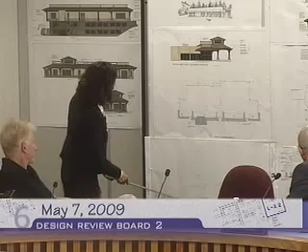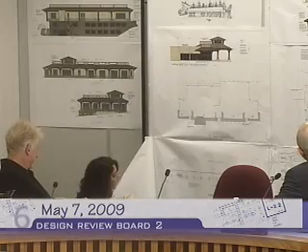This is the pavilion which is proposed at the entrance to the Vons. It's a double height pavilion. The marker is proposed to the side, actually on the next one. The marker is proposed under, to the side of the dining area under the pavilion.

The 4 parking stalls will have to be removed and will be replaced by 5 new stalls on top of, or adjacent to, building number 2.

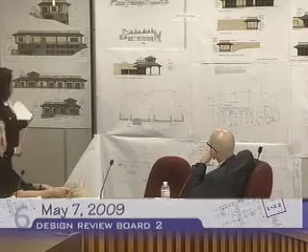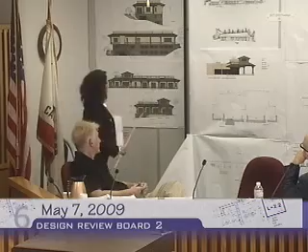The buildings in La Cañada Flintridge Street, I've got some drawings here so you can compare them together. As I mentioned, the design of the proposal matches the already approved or recently approved design of the building next door. You can see there the location of the main building, building number 1, building number 2, and that is the building in La Cañada.

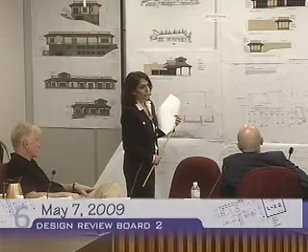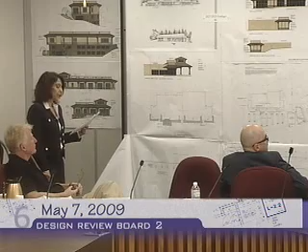The site is essentially unchanged. The proposed design of the 2 facades are appropriate for the neighborhood, and staff recommend approval of the project. This concludes my presentation. If there are any questions, I'd be glad to answer. Thank you.

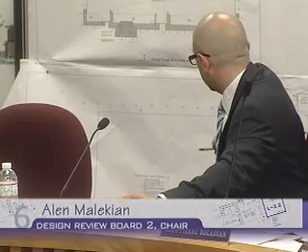One last question. I'm glad that there's openings, but is there any reason none of these openings were aligned or somehow worked with this pavilion, the so-called pavilion?

The pavilion was suggested by Alan Loomis to align with the main driveway, the entrance to the center. He asked that we replace all that storefront, putting in these new storefronts and doors. The doors have to meet code requirements for the Vons interior improvements, so that's why we have two new entrances now, one at either end of the existing opening.

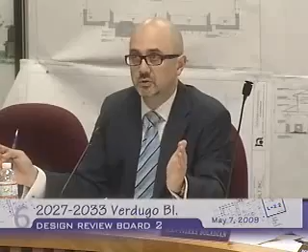These are concrete tilt-up buildings, so we're dealing with an existing opening. Most of these openings are happening within the storefront section—there's nothing new being opened as far as I can see. That's correct. So we have to deal with an existing opening, and we have to deal with the code requirements for the Vons improvements.

We also have to deal with the existing structure on the outside. We were asked to provide a pavilion that met the size and scale of the proposed pavilion on the adjacent property, and to do that, we needed to use two column bays to support it.

Is that roof structure coming out the existing roof structure you're using, or are you reframing that? It's reframing, that's all new. You're only maintaining the glulam? There's a note in there about the glulam. Yes, we're maintaining the glulam and removing the existing mansard at that location of the pavilion.

Is the rest of it the same framing? Yes, same framing. Okay, the roofing material—the existing parapet has a slope to it. You're showing it as vertical? Yes. Are you making it vertical? We're making it vertical to match the new building. Okay, that's great, I'm glad you're doing that.

Because of the way this recycling center operates, they have these bins that need to be moved. We need maneuvering space for it, and we also like to minimize the number of parking spaces they occupy. So we're in talks with the recycling center. There are different configurations we can use that minimize the amount of space they take up in the parking area, but we haven't decided yet exactly where it's going to be.

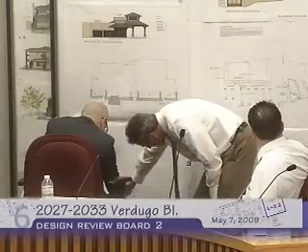The way I read this, the new door is going to be here, is that what it is? Yeah, we have an existing door here, biparting sliding, and this is another door that will match, same size, but at the other end of the opening. Okay, so where's the new opening? This one is the new opening. Okay, this is the new opening.

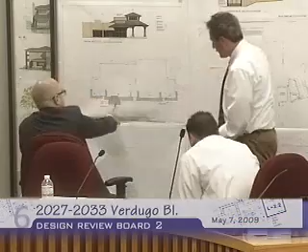And there's no opening within this area? There is an opening here, there's a post there. So all I'm trying to figure out is, this is going to be a focal point for people to drive up, and once they get here, are they going to be able to get into the building from there? Yes. I don't see that. This is the most direct route into the building.

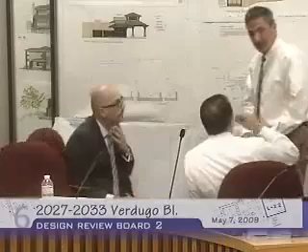Can you show it on the elevation of the entrance? Yeah, let me go to this revised one here. We have the new pavilion, which projects, we have our sliding doors here, and our new sliding doors on this side. Well, the upper portion, the symmetry, it's out of center. I don't know, you need to revisit that. Well, this aligns with the driveway. With the driveway.

We complied with the request. Could you realign it, or do a double post at both sides? We centered it for effect - 3 posts here supporting this new canopy and the pavilion.

The dining area that's been spoken of will be below this canopy, not in the pavilion, because the pavilion's an entryway, right? Well, this pavilion is double wide. It has it on one side, so it'll be on this side.

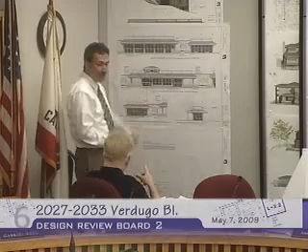What are the cement tables? Will there be tables and chairs, fixed or? Probably fixed - normally you see supermarket cement tables. So is it of that nature? I would think so.

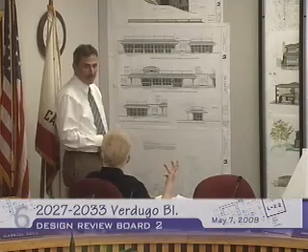I think what's not clear on the drawing is that you have an element out in front of the lower roof that you're not seeing, the double wide element. Is that like a half wall obscuring shopping carts? Yes, we're providing a new cart corral in front between the two openings.

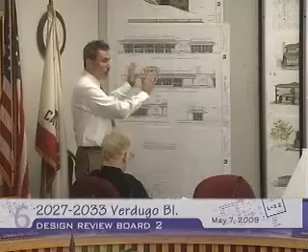Is that happening at the furthest out post, or will it be further back? Closer up to the building. The revised floor plan shows the location of the corral.

I have one more question - while you're here, how come we don't have landscaping at this location? You have the sidewalk and then the paving, and no landscaping planters. Yeah, that was the element I was talking about.

But what is this area that you're having outdoor? This is a restaurant at this location. We want to expand the sidewalk so they can have some outdoor seating.

What about the location of the recycling bin currently? Recycling bin is in the front, right here - that's where it is now. Wait a minute, but he's talking about the top. Oh, so you're thinking of moving it? We're expanding the sidewalk so they can have outdoor seating here, and then you're going to move it back.

The existing recycling center is right here. We're going to relocate it somewhere back and away from this entrance. So you don't know where it's going to be yet? That's correct, we don't know yet.

What are you doing with this one? That, right now, is an existing trash enclosure. Is it remaining? It'll remain, but we thought we could modify it so that we can relocate it here, but it may not work out in this location because of the maneuvering requirements.

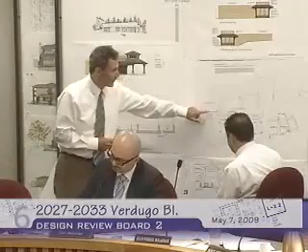Approximately how much do you have between this for the required backup for parking? 25 feet. One thing I'd like to ask your consideration on - you have this loading dock, which is about 60 feet, and they're backing into that loading space. Yes, and then you have people sitting here.

Are you proposing any bollard or protection when people are eating here? The deliveries come before the store is open. Well, you never know - I see sometimes deliveries in the afternoon, emergency delivery, and then you have this truck backing up here with people sitting here. You need to give some consideration or relocate it somewhere.

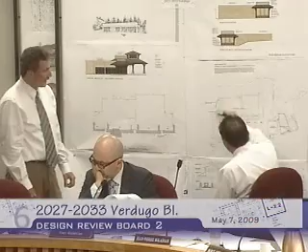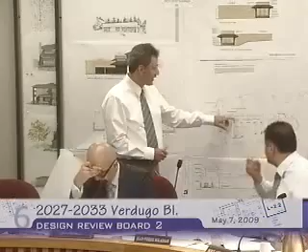I have a representative from Vons here who may be able to address this. If I may, our understanding, which maybe should be addressed to the applicant, was that the outdoor dining area would be near or under the pavilion area where the main entry is. Was that a misunderstanding on our part, or has that moved? No, that is correct, it is in the same location under the pavilion. This is an additional widening of the sidewalk adjacent to the existing restaurant to provide some outdoor seating.

So that's information that was not on the drawings that staff did not have when we were preparing the report. It's always been on the drawings.

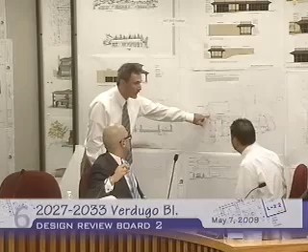So the backup you have there is 24 feet or 20, what do you have? 25 feet. But for loading trucks, semis, I think you're already making it narrow. We're not making it that much wider, maybe 2 feet. No, we're making this sidewalk 2 feet wider. I know, but you're taking away from the driveway. And you think this 2 feet is going to make a difference? You need wider than that.

I wouldn't agree with that. Okay, all right, thank you.

I have to add that they would need a variance for the recycling bin being located where it is proposed. If it stays in the same location, what happens? Do they operate under an existing permit? I believe they still need a variance. They have no permit for it. I believe it's an existing code violation. Yes, it is a code violation. Is that something that needs to be addressed as part of all this? Well, they are addressing it by removing it from the current position, and relocating it would require a variance.

Thank you. Is it Lee Ducart? Mike Lawler? My name is Mike Lawler, and I live in La Crescenta.

I'm in favor of the project as designed. I've been here several times to oppose projects, but this time I'm here to say that this applicant gets it as far as the overall look is concerned. It doesn't look like it just dropped out of the sky. It's designed in a way that fits in with the feel of the community. One of my preferred architectural styles is Craftsman, in particular the stone and wood facade as seen here.

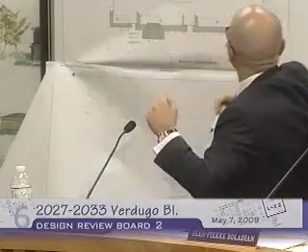Usage of the plaster and these elements here - usually in craftsman, the facade is expressed with siding, some wood siding or other elements, not stucco, not even the furring that's getting plastered over. So nothing in these elements tells me it has to do with craftsman. The only thing craftsman is this.

That's all I'm seeing as being truly craftsman architecture. The rest of this stuff, the storefront system being used on top, there's opportunities that are completely lost to bring that true architecture in.

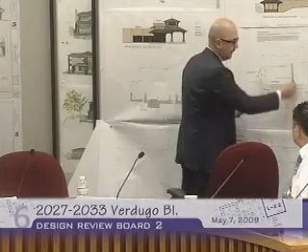The definition of craftsman is symmetry. You have symmetry using the centering of the system, and I agree with staff that centering this with an element there, I think it works. But unfortunately it only works as you drive up. When you're looking at it as an overall building, it creates an off-balance look. So I think by creating this symmetry, even if this element was representing another major focal point, I would have added another element there to carry the balance over.

I would not have covered this entire top piece with plaster fascia boards. I would have removed the fascia boards, exposed the rafters, let them sit exposed on these beams, and let all these beautiful details that craftsman brings in come out. Not just be happy that it's taken almost 40 years to remodel this thing, when we're remodeling something that's probably going to stay for another 40 years.

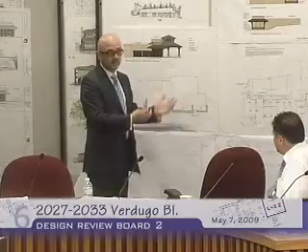Is this what we really want to have? I mean, I really like craftsman, but let's get it to the level I think it needs to be, and then it brings back all these elements. You've got this wood, and you're covering it with plaster here. Why can't the post and beam system just be carried through? Let that be a part of it.

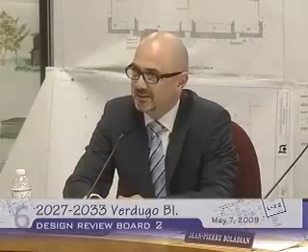One of the places I was thinking of bringing up is Grand Californian, the Disneyland hotel. As you drive up, it's true craftsman detailing, like a pavilion. You drive into a pavilion and there's no plaster used there, and that's something very local. You can see how the wood and all these details work together. Craftsman is defined by skilled people carving and fitting these beams into each other, and I think it starts doing that at this level, but from here on you're wrapping these with plaster.

Why can't we just have wood? Why do these windows have to be enclosed? Why can't it be open trellis, open windows, or wooden windows cased in with post and beam headers, and all these details that are truly lost? I understand these have to maintain function, but over here as you walk up, you're just going to see this plastered box with windows placed in.

What part of that is craftsman? I mean, the idea is great, but there's nothing craftsman about this thing. I like the river rock, I like the details. But I think the first thing everybody looks at is this detail, and everybody loves it.

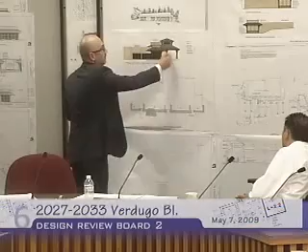But they don't go beyond that. They don't get into the details, all these elements that are truly lost in developing this thing. Actually, what I'm saying is it should cost less rather than more. With exposed rafters and exposed beams, I think that would definitely be a lot more interesting design, and have a building that's truly going to last for another 40 years.

For someone else to come and say, 'oh my God, look at this, this building was built in the 1950s' - no, it was built in 2009. So that's what you're trying to do, make this building look like it was built in the 1940s and 50s, when it was truly a craftsman style. That's when a lot of the good architecture came out, and now in 2009 we want to build something that will look like it was from that era.

So if we're going to make this thing look like a craftsman, we talked for 20 minutes about the history of this building and the site. Let's bring out that architecture, let's bring out the era, let's make people understand this is from that time, and not something that just came out there.

This is craftsman influenced. We're not trying to mimic a style. This is a commercial building, not a private residence, and it's not Disneyland. We have maintenance issues. We're dealing with existing wood beams that have not aged well because of lack of maintenance, so it is our intent to plaster them and make them last longer, look better longer.

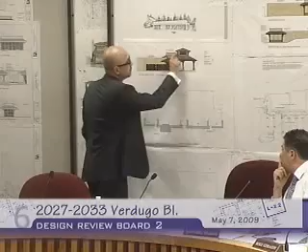Existing structures that provide screening for the rooftop - no, I understand, I'm okay with that. But these brown little details you're adding as accents, then covering with plaster, which looks like a Mediterranean-looking accent detail that these buildings use - these little details, you're talking about maintenance. You've got a foot-wide plaster section, about 25 feet up, with these windows there. Wouldn't it be better to just completely wrap this with some sort of wood or something that would last longer, rather than these?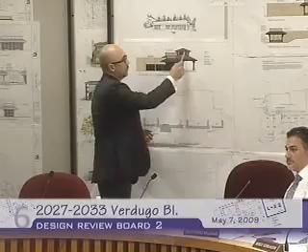Wouldn't these crack? Wouldn't this be more of a waterproofing issue? Wouldn't there be other elements there? These windows here, can they be louvered? Can they just be open? Can they bring air in? Can they be those things?

We considered those things. We've done other buildings in the Foothill area, another craftsman up on Foothill. We've looked at the Ross up on, I think that is Foothill, but they have pigeon problems. Wherever you leave openings and open wood framing, you get pigeons. I'm not going to design this for you, but I'm just saying.

Bring in more craftsmen into it. More craftsmen. Okay, let me finish my talk. Thanks, I said my piece here.

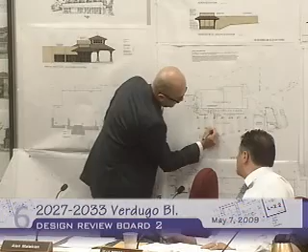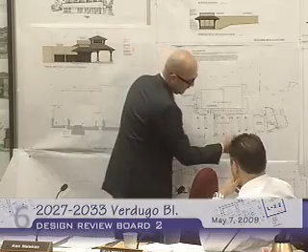The other two items: landscaping. We obviously have the diamond planter areas that don't encroach into the parking. They can plant some trees here. Obviously Mr. Carter said that if it's cost prohibitive, then so be it, but I think after 40 years of waiting, a little bit of landscaping wouldn't hurt. I would like to see better landscaping, trees, some more lush vegetation.

I'm not sure what this parking is all about. It's shown as parking, but it's never been used as parking. It's been used for recycling, and I don't think anybody would park here and get up to here. That is actually used for the recycling - people park there to use the recycling. And I'm assuming that this recycling came after, and this parking was part of the calculations for the place. It could have been at a very different level.

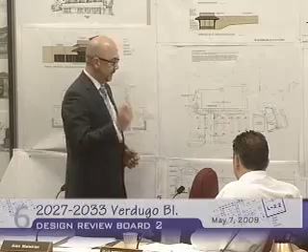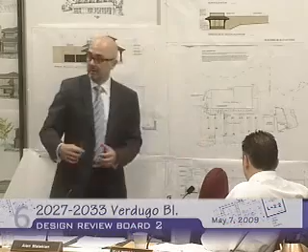So anyways, I think landscaping in the front is essential. The other problem, I've used this shopping center many times, and one of the main problems is the grade here, the grade change from the driveway as you exit out. So I would suggest some solution there. I've heard a lot of complaints - people knew I was going to be hearing this, and they came to me. There's a steep slope that connects the driveway into the street, and a lot of cars hit their front end, and it's just a pretty bad situation there. So I think this is a good opportunity for that to be fixed.

Other than that, as I said, if we're going to do craftsman style, if we're bringing up history, and if we're going to that extent of putting plaques in and celebrating the history of the site, I think we really have to be true to its architecture and not just do something halfway.

Well, let me just ask my fellow board members, excluding my chairman. My chairman, who is a great spokesman for more modern designs and has executed many very nice projects, has embraced craftsman style with a vengeance here, to your chagrin I'm sure. So I'm just asking my other board members, in a practical way, how do we support that if that's something we would want to do?

I think it's a difficult hurdle to set. I'm relieved by your passion for it - I think that's wonderful. I think if we set the bar too high, people won't ever try for the bar. If there are elements in this that truly could be addressed, I think we should address them.

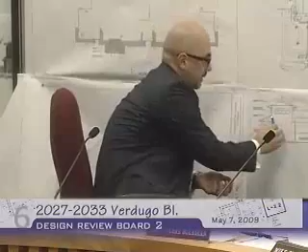There are areas here, you've got a beam going there. There's a great opportunity to use some other elements there, expose these rafters, rather than covering this whole thing and creating this plaster box area. You could even go to an extent, depending on if they're willing, go ahead and carry this thing and make this open, have a post and beam detail there, rather than windowing this in, which is going to be a cleaning and maintenance issue in the future. Or pigeons. Or pigeons, go ahead and make this an open kind of lattice work area there.

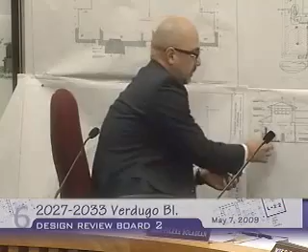There's a lot of ways you can make this thing work, rather than creating, you come in, you see this, but then the rest of the stuff is just a plastered box. Okay, we've taken down a lot of notes.

So if it's okay, let us repeat back to you some of what we've heard, rather than having to ask you to repeat everything you've said, so we can get some agreement. Okay, shall I go? Okay, I'm going to go over the comments I've got: consider introducing true elements and details of craftsman style to provide a more authentic craftsman style.

Is that it? And then Mr. Boladian mentioned such as sidings and colors. Also, another thing, it's basically celebrating the structure more, exposing it a little bit more, like Alan was saying. For instance, let's have, for just a minute, maybe a reflected ceiling plan of this whole corridor, exposing the structural members every so often to break that up.

I don't know how you're designing that ceiling, but introducing and exposing the members, celebrating the structure and craftsman style. Okay.

If I may, excuse me.

It seemed to me the discussion had to do with a modern interpretation of a craftsman style. I heard one board member speak of that, and we didn't really get feedback from the others. Would you guys be open to it? Either pulling back slightly from the style, or doing more of a modern interpretation of the craftsman style.

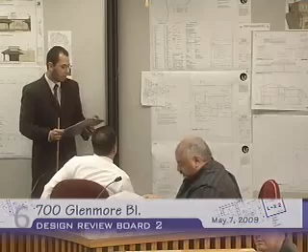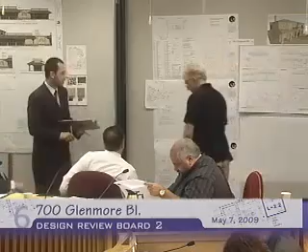The project summary is as follows: the project is proposing to add an 805-square-foot first-floor addition and a new 715-square-foot second floor, and to change the architectural style of the existing residence. The total proposed habitable floor area will be 2,080 square feet. The existing property contains a 560-square-foot single-family residence with an attached two-car garage built in 1947. The lot size is 6,933 square feet. This project is exempt from CEQA, and is also located in the R1R Hillside Zone.

If I may mention, the board members' packets reflected slight discrepancies within the roof plan. The applicant has provided clarification here, but I also have the previous plans with the colored elevations. The material board has been provided with further detail of the actual color, but changes to the new plan regard this roof ridge, changes in height to the railing, and elimination of the line right here.

On to staff comments regarding mass and scale: the overall location of the addition appears appropriate to the project site and neighborhood context. The essential site plan remains unchanged. Staff would recommend a landscape plan be provided to complement the new construction, and to remove excess hardscape within the front driveway. While the neighborhood contains predominantly one-story homes, the proposed second-story addition is set back from the front of the house, reducing the appearance of a large project. Overall, the mass and scale of the proposed project is compatible with the neighborhood.

Staff recommends approval of this project with two conditions. The first condition is that the applicant provide a landscape plan to eliminate the hardscape here towards the front, and the second condition, as always, is to have the applicant provide a high-quality recess window and also provide a detail to show the recess for staff's approval. I'd be happy to answer any questions the board has at this point.

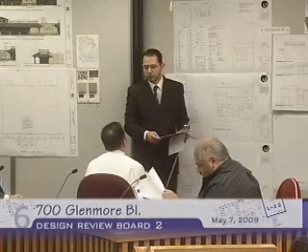Did the fire department look over this plan? I do not know, I can ask the applicant if the fire department has commented. I know that planning has reviewed it. When I went there...

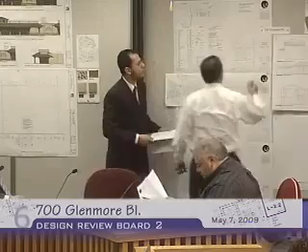It doesn't show here the neighbor's house. It's like right here, it's like less than, I don't know, I'm not sure, it's like less than 6 feet, plus or minus. And then when you look in elevation at the parapet, this is the house, the neighbor is right here, you have almost like less than 3 feet, maybe plus or minus, and it's pretty tight. I don't know how the fire department... I mean, good comment.

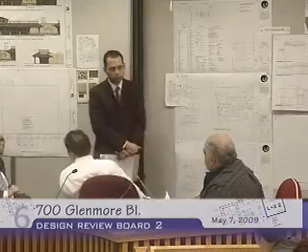I can also bring up the aerial photos for the other board members too. Could I just ask you about what I'm looking at?

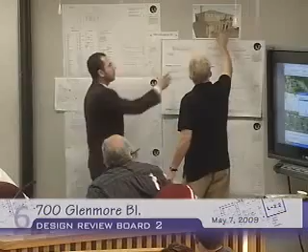Would you characterize those as balconies? What are those pillars in the front, and this porch here - is this characterized as a balcony? What's this called? This is a colonnade.

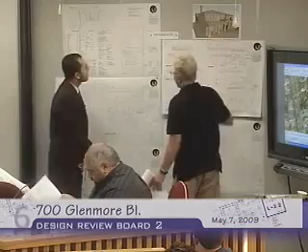What is the square footage of this? Is it the 100 square feet that I see? Plus or minus, I can do that. The applicant calls out 100 square feet to be the balcony size, it'll just be slightly bigger. And what would be the measurement between the back of this pillar and the wall? I can find that out for you, I can scale that in a moment.

So the existing roof, they're gonna slice it out and redo the roof, that's right? Correct, yes, they're not keeping the existing roof. The existing roof has minimal pitch. So they're demoing the first floor interior walls, which they can, yes.

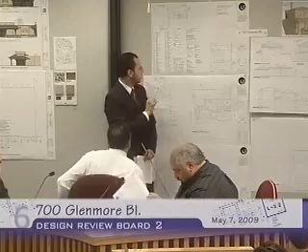And the existing portion is what, 700 square feet? No, the existing house is approximately 560. And the total is gonna be 2,000 something, right? 2,080 square feet, 3 times the existing size, so almost at the 30% threshold where they're allowed to.

There is permit history on this, yes, yes sir, for the second floor? Yes, for the second.

Because the windows, it looks like the second floor window is changing though. I can't imagine they'd let you put a new window with a 1-foot setback. You might be able to save the old one, but I can't imagine it being a new one.

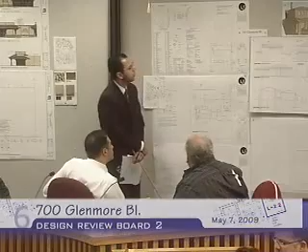And then that fireplace is going out, the existing one, they're demoing it. That goes down, that's correct, that's shown here on the aerial shot. The fireplace goes out, the interior walls go out, nothing's left, technically.

It is, yes, it's my understanding that, yes. How old is this house? This year was built in 1947. That's probably wooded, okay, that's a very good point. Wood is okay.

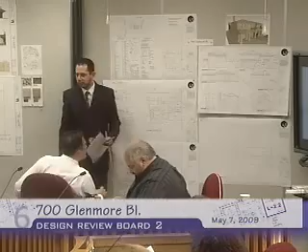I have a material board and pictures for you.

Is it Carl Garabedian?

Hello everybody, I'm Carl Garabedian. I'm the designer for the project. My address is 18075 Ventura Boulevard, Encino. I'm with KSG Design Group.

We've worked with staff, the planner, and the urban designer regarding the front facade design and the entire house itself. Initially we had a higher porch, which was 2-story high. We worked with that to bring it down to 1 story, and we added the element of the colonnade, which carries the balcony on top. That gave the building an appearance that it's slightly set back from the street and not as massive as it initially was. We've worked with the sizes of the windows, made them smaller on the front and side facades, to be more proportional to the size of the house.

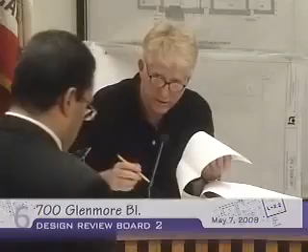This is a question: there are 2 large existing trees there. Do those stay? Yes, the two trees will stay. We actually have a tree report done. We were required to prepare the tree report, which suggested that we can keep the trees.

Thank you. Do you have a material board? Yes. How about the windows and the doors? The windows we chose were Andersen brand. Do you have a sample? No, I don't have a sample. How about the garage door? The garage door will have wood paneling.

Do you have a picture of the brand? Is it wood or painted aluminum? Yes, that's a typo. We actually ended up deciding on having wood panels, plywood panels, cleaned.

How about the entrance door, the decorative metal door? It will be a custom-made door with glass inlayment. You don't have pictures? And then how about the railings on the balconies? Is that the design? Yes, it will be a very minimal design for the railings.

And what is the window surround? Is that a stucco surround? The stucco will be the covering for the house. No, around the windows. Well, the windows will be, as mentioned, recessed windows. That was suggested by staff, to have them recessed.

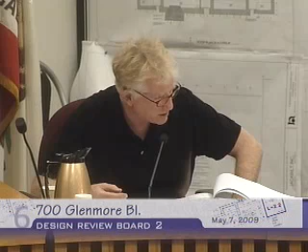Mike, if I may take advantage of your expertise, can you walk me through the front, the porch and the balcony? Is that an actual usable porch? Those columns are 3 feet from the wall. There's a little space in the middle, I guess you could put a chair. It's more of an architectural element, I think. Is that a good use of square footage?

Well, I think what might be positive about it, which I hope they could look at again, is that if you were going to generate a balcony above, by making it nice - you see, when you look at the perfect examples, look at above the garage door, there's just sort of a pop out, as minimal as you could do for that balcony. Wouldn't it be unfortunate if there was just another one there? So they've done something by doing a large architectural element below, which I think makes the balcony more possible for that reason. But if I'm looking at it, it's a 20-foot setback from the street.

Is there a usable porch? It's not a usable porch. And like I was saying, I think there could be some positive if it was embellished, because I think it gives a nicer support for the balcony, if you were going to have one, than the one over the garage. I think the one over the garage is a problem.

He's calling out a cricket between the two roofs, but he's actually showing a full ridge between the two. I just think it looks too unarticulated, not enough going on. I've said before, you can have a strong mass building in this style, but it needs to have interest to it. So I would be looking for more articulation.

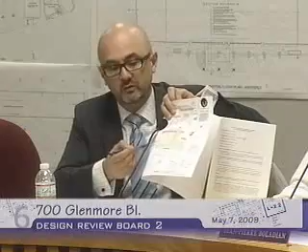There's a site survey plan attached to the set on the last page, I think. The slope actually comes forward on the new portion of the house, so we are supporting some dirt there. That's one of the reasons we're trying to keep the existing house, because it would be cost prohibitive to push it back. The retaining wall gets there about 6 or 7 feet already.

Okay, thank you, you can have a seat. Thank you, all right.

I think it's a simple design, so I don't have as much problems with this as I would normally have. I think it's simple enough, but there's a lot of inconsistencies in the actual proposal, so I'm not sure how we can go ahead and approve this. Maybe it's a continuation to clarify these items, maybe I want to put this on the table.

Couple of things. On your material board, you're saying you're going to be using Eagle Roofing roof tile, but on your elevation you're showing Spanish tile roof. Windows, you're saying it's painted aluminum, but you said it's Andersen wood windows. You're specifying the base of the entire facade as stone veneer travertine, which I don't see anywhere in your material boards.

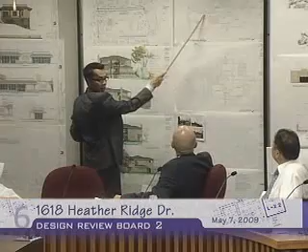The garage is close to the entrance and should be separated further apart to improve circulation and flow. If I may point that out to you, this is the area I'm talking about. This is a two-car garage, and this is a third-car garage. So this area appears to be tight, particularly when you have a car parked here. That's the intent of that condition.

Push that out, or is it possible? Are they within... there's a foot and a half left in terms of the setback towards the front.

Third condition: eaves and overhang should be open, not closed or boxed. Fourth, columns supporting the front covered entries and balcony should be of a simple square design in appropriate weight. Fifth, the supporting columns and walls of the rear balcony and covered patio should appear wide and heavy and should be reduced and made lighter in appearance.

Sixth, all windows should be either awning, casement, single hung, double hung, or combination thereof, and constructed of wood or fiberglass with divided light. Windows should be recessed from the face of the wall. The entry doors should be clean, simple design as shown on the front elevation that is consistent with the style of the house. And ninth, the garage door should be wood or fiberglass with horizontal expression.

Tenth, the existing landscape and tree located along the east property line should be protected during and after construction to ensure an added level of privacy. And number 11, which is not reflected in the staff report, staff is unclear as to the tile materials proposed for the base of the building and is looking to the board for guidance on whether a condition is needed for the project to use wood or Hardie plank instead. That concludes staff presentation. Thank you.

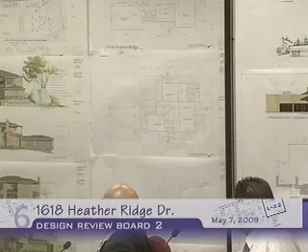Even our balconies, these two balconies, if you look in the elevations, you will see that it is blocked. 5 foot of it is blocked so that there will be no view. However, I think the good light and the sun comes from the south, not from the west. And there are a lot of houses in Glendale that even 1-story houses next to each other, looking to the side, you will see your neighbor's wall. In this case, with the 17-foot setback, even you don't see that.

So the foreclosures, by the way, she was mentioning, that's not because of people building new houses. As you can see, 6 of our neighbors, they sent a letter, and they know why they did that. They know that a new and nice and better house built in that neighborhood will raise the value of the houses. The foreclosures have nothing to do with the houses to be built in that neighborhood.

That's because of the recession or some other issues, I don't know. That's all I can say, and I am asking to look at this project favorably and to approve it. Thank you.

Public session is closed. Can I have you request of Tim just to do the little once-over about our abilities with second stories and what our limits are? Sure, what we can do. Tim, did you hear ask that of Tim? Is he here? Can you give us a quick once-over to everybody about what our limits are in terms of approving or disapproving second floors? Sure, just a quick once-over for everybody.

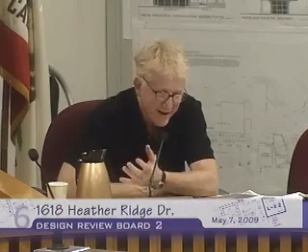Okay, thank you. Let me just the opening salvo, because from my mind I can eliminate certain things. We've had applicants and people speaking for and against projects always bring up the economic considerations, what'll be a good deal. So it works both ways. For the people in opposition, I can eliminate, in my thinking, concerns about property values in the design area. But for the applicant, that cuts the other way too. It doesn't mean that having the most square footage is also a good deal too. So I can take both of those off of my table.

Looking at this area, I found compelling the thought that the initial development of this area probably didn't envision 2 stories on the upslope, on the upside. If we're looking for historical beginnings, they probably didn't envision that. So I take that very seriously. Privacy, it's funny, I'd love to go back and just argue about craftsman style. It's a lot easier than talking about privacy issues. So let me just put those 2 out there and kick the ball to someone else, and maybe we can come around.

I guess I'll go. The only reason I had Mr. Foy mention that about the second floors is that we do have a limit in terms of aspects we can deny based on that. There's probably nothing more unfortunate than the second floor going in and removing privacy, no question about that. And I think it's because of that, like I said on the previous project, when you do a second floor in an area that has single stories around it, especially adjacent, you have to be very sensitive to it. And so consequently, I think in a general massing sense, I don't really have the ability to deny the second floor, whether it is or not, so that's beside the point.

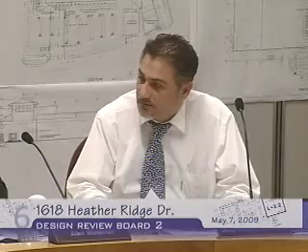Well, I can't get enough of these pictures, but I love these pictures. We can see those. Yeah, I kept them here. It's nice pictures.

I think everyone has the right to do whatever additions, whatever they need to see fit, if the code and the zoning allows.

As an approving body, as a design review body, as myself sitting here, I think I've been placed here to give my opinion about design and how it impacts its neighbors, how it functions, and how it works with its site and how it's been located.

And we've given a set of guidelines - the single-family residence guidelines, the neighborhood guidelines, and other guidelines that we have to follow. We have to look up zoning, and one of the guidelines given by the applicant is the architectural style and what their intent is. From there on, it's our responsibility, my responsibility, to review the design as presented.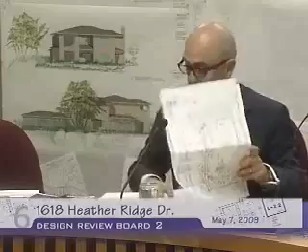I'm not sure if there are any ways that we can go ahead and massage the second floor as far as the function, the way it's laid out, elements pushed around and in and out. But as being a ranch style...

I would probably step back and say this is definitely not a true ranch style. It's more modern. I wouldn't even know, and so I think...

Simplicity - I think it's a simple enough building that it's going to truly complement the building form. If it was designed in a way that was more grandiose with a lot more Mediterranean details and elements, I think that would definitely hinder and affect the quality of the building.

But I'm torn about seeing the large second floor mass. If there are ways that we can have that pushed back - I'm not talking about reducing the square footage, I'm not talking about changing the functions of the second floor.

But I think as far as looking at the front building, having one square box, I would probably like to see kind of a stepping down element there. That's what I was thinking. So I don't know what you guys are thinking.

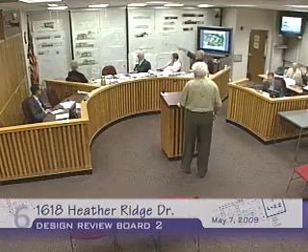We had exposed, maybe you see this bathroom here, it'd give more character. Yes, in fact that is for a short distance. If that is one of the things you want me to eliminate, I can take this and insert it into this area, so that you will see the setback like this. That's what I was commenting on. Exactly, and then the north side went the same way, or the other side, because there is already a tiered back here. Right, and then you have one on the other side, the pop out on the other side.

But what are we going to achieve with that? Nothing will be achieved on the other side. The other side neighbor has no complaint. As a matter of fact, they are looking to our backyard, and we are peaceful neighbors, and we have no complaint from us and from them. It wasn't a privacy issue, it was to minimize its impact, the second floor impact.

For the record, on that southeast elevation, we talked with the applicant about eliminating that piece that popped out, and we thought, okay, well, our other choice is to have it be a full-height two-story wall with less articulation. So I just wanted to own up to that piece.

No, it could still have the lower section. I'd like to have the roof below it, so the roof over the balcony. But I think to be transparent, the concern was if that piece was eliminated, we talked with the applicant about the potential of having a blank wall, but we definitely see that if there's a roof covering the patio, it would maintain the one-story look at that elevation.

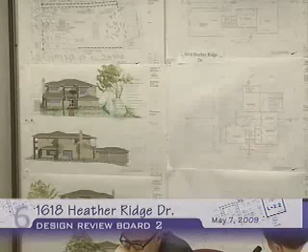Yeah, maybe it's kind of, I don't know, maybe it's breaking up, it's too vertical. Let's break it up, because if you make that room there too small, then this room loses its function here. But I can eliminate that pop out. It's not easy, but you have to do a big window.

Mr. Malikian. As the applicant, he's the one who's getting... well, yeah, he's the one trying to get our approval. So, ask him if he minds if I say something.

We want to agree, I think we all want to solve the issue. I've been busy working, but the relationship is good and we'd like to solve it. I'll talk to them directly. We invited them to come. Actually, that's fine. I was out of line there, I guess, before they called from Channel 6 and told us to stop. So, five minutes to finish?

Well, you guys need to make a motion. Can't do that. Well, anybody? Okay, I'll make the motion. You want to make the motion? Okay.